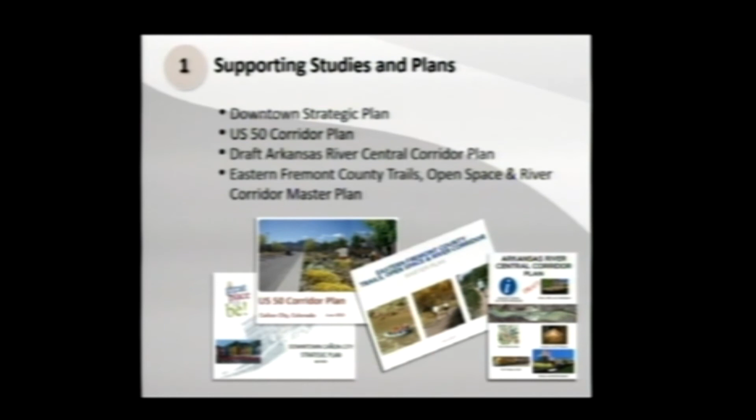So we wanted to make sure we were being consistent with the downtown strategic plan that the city had done, the US 50 corridor plan that was done a couple of years ago, the draft Arkansas River Central Corridor plan that was ongoing, as well as the Eastern Fremont County Trails, Open Space and River Corridor Master Plan. Those are all plans that were overlapping and had a relationship to what we were looking at here, and that was the basis for where we started.

So some of the key ideas out of the downtown strategic plan were, we wanted to have that quality and safe pedestrian environment. That was one of the key components. And looking at pedestrian crossing of US 50 with the connection to the parks and the riverfront trails and the Royal Gorge Route Railroad was an important piece of that. And that's something we carried through.

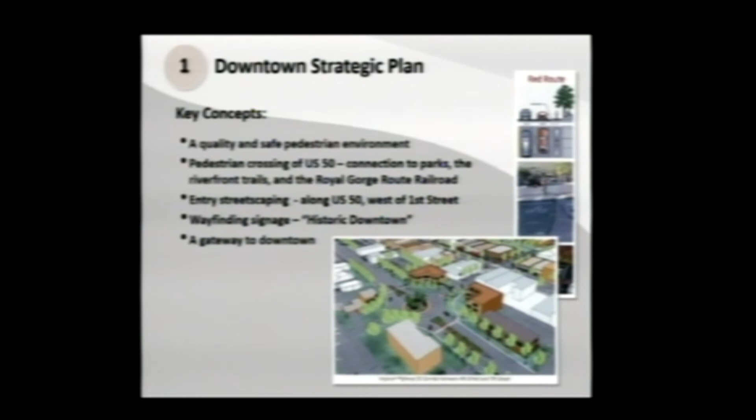We also were considering the entry streetscaping along US 50 west of First Street. That's part of what was coming out of the downtown strategic plan. And also the wayfinding signage from the historic downtown was a component that was also being considered.

The US 50 corridor plan had sort of taken the downtown plan as well and expanded on it a little bit, where US 50 really was a spine connector between Main Street and the Arkansas River, and really, where everybody's coming through. It almost acts as Main Street, even though it's not. We wanted the downtown gateways at First Street. It was one of the key components, as well as further down at 15th on the east end.

It also had 4 options in the US 50 corridor plan, which we used as a starting point for the alternatives and concepts, being the modified 5-lane concept, a 4-lane offset with a cafe zone, and a 4-lane with medians. The US 50 corridor plan also identified that need for wayfinding, very similar to what the downtown strategic plan was.

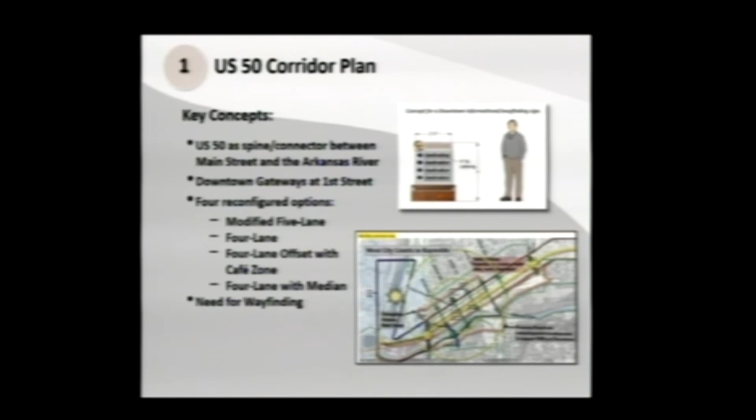The draft Arkansas River Central Corridor plan, some of the key concepts that came out of that were integral to our study. The primary gateway features at First Street was becoming a pretty common theme. The planning extends across US 50 between First Street and 3rd Street, so it was sort of that downtown area. It's also a visitor arrival area shown in Veterans Park.

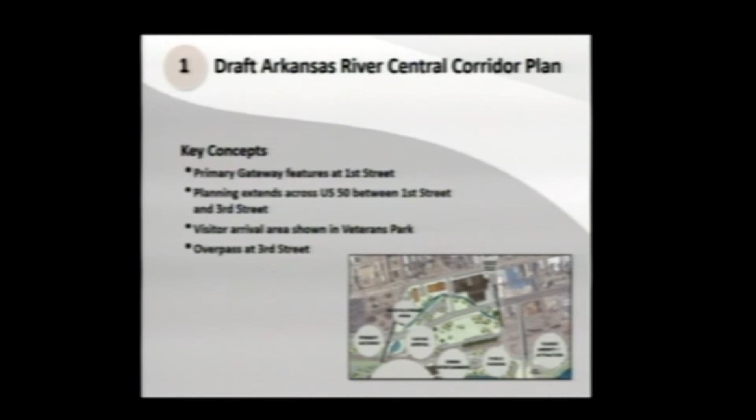So, you have a lot of people coming from the west, and that's sort of the first thing they see is Veterans Park as they're coming into town. And they also had an idea and a concept of an overpass at 3rd Street that was being considered.

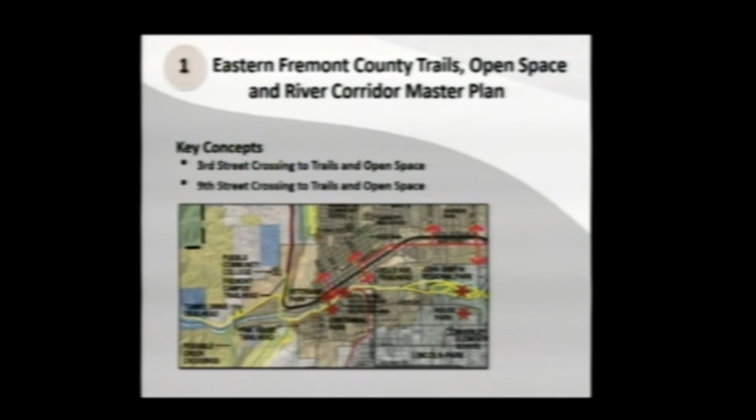The Fremont County Trails Open Space Plan, their key concepts being the 3rd Street crossing to trails and open space, and the 9th Street crossing to trails and open space. So we wanted to keep that consistent and work with how they were looking at getting the access from the trails to the downtown area.

So the study area itself, really when we started, was from 3rd Street to 9th Street. We expanded that a little bit to include 2nd Street. As part of the project, we figured it made sense to look a little bit further to the west. It includes the signalized intersections at 3rd Street and 9th Street. It includes both sides of US 50.

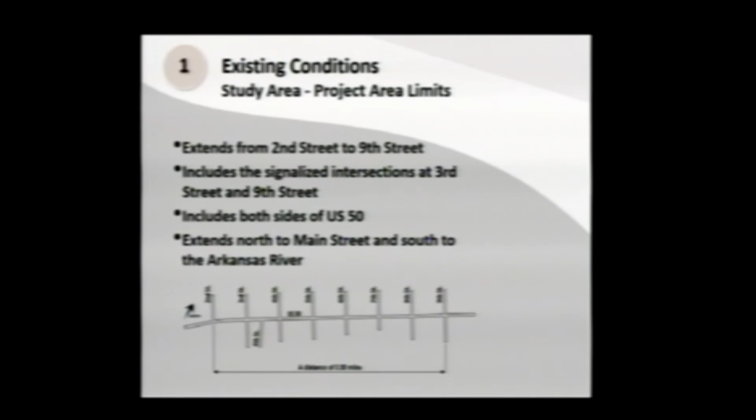The other extents of it extend north to Main Street and south to the Arkansas River. So it's really a very similar footprint to what the US 50 corridor plan was, however, just concentrated to this downtown section.

So as we get into looking at the existing conditions, the speed limit in the area is posted at 30 miles an hour. It's currently a 5-lane section that includes 2 through lanes in each direction plus a 2-way left turn lane in the center, with basically unfettered access between 3rd Street and 9th Street. There is a signalized intersection at 3rd Street and one at 9th Street.

If you recall, the history there is I believe there was a signal originally at 6th Street. When there was a desire to signalize 3rd Street, they actually moved the signal from 6th Street to 3rd Street, probably about 10 years ago.

There also are attached sidewalks that are varying width and don't meet ADA standards and aren't compliant right now in several areas. And several of the pedestrian ramps are not ADA compliant. Neither are the driveway crossings due to the cross slopes.

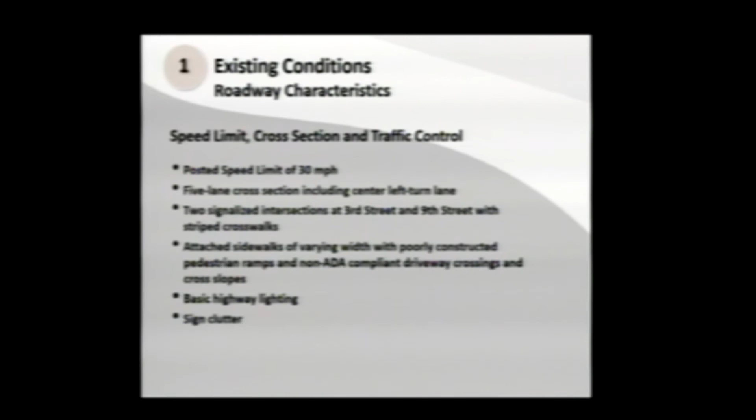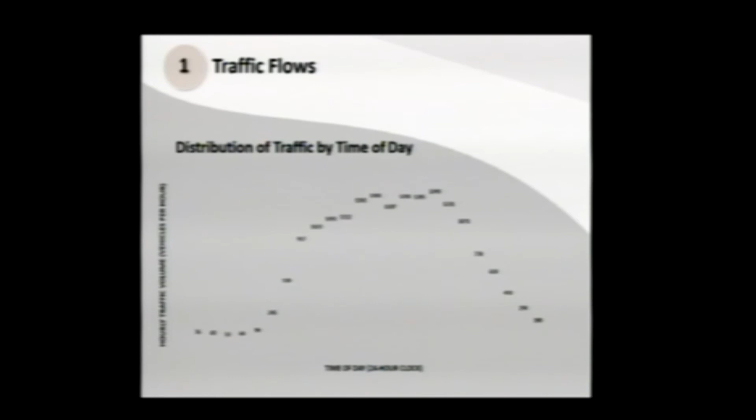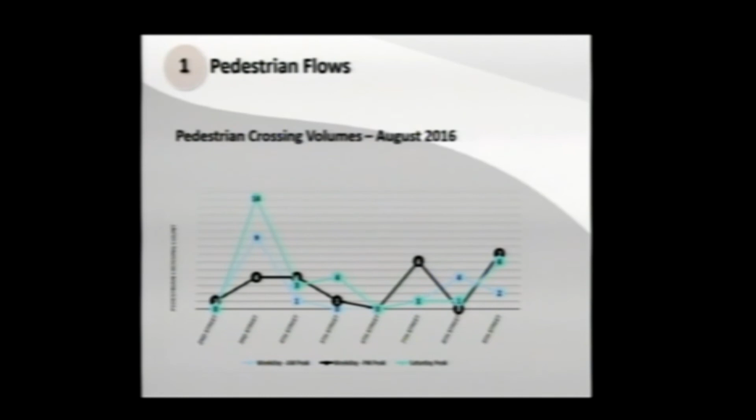We also looked at the intersection levels of service to determine what traffic was happening, so we understood what changes might impact traffic. In traffic analysis, operations are determined by what they call level of service. It's defined by the average delay that a vehicle has, with level of service A being the best, pretty much free flow traffic, to level of service F, where you're pretty much at a standstill and stop and go.

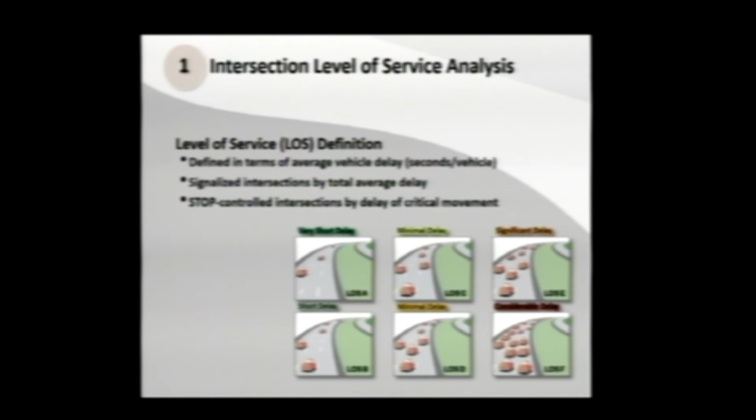As we go through our intersection analysis here, in general, at our peak times at 2nd Street, generally speaking, oops, hopefully I don't lose it. Yeah, so just sort of an example of what the volumes are looking like and the level of service.

We can see that the volume is heaviest at 9th Street and east of 9th Street. It starts to tail off as you go to the west, where you're at 21 to 24,000 vehicles per day east of 9th Street, and by the time you get to 3rd Street, you're between 12 and 17 here, I guess, at 2nd Street. So you can see a lot of traffic does start to fall off as you go west through the corridor.

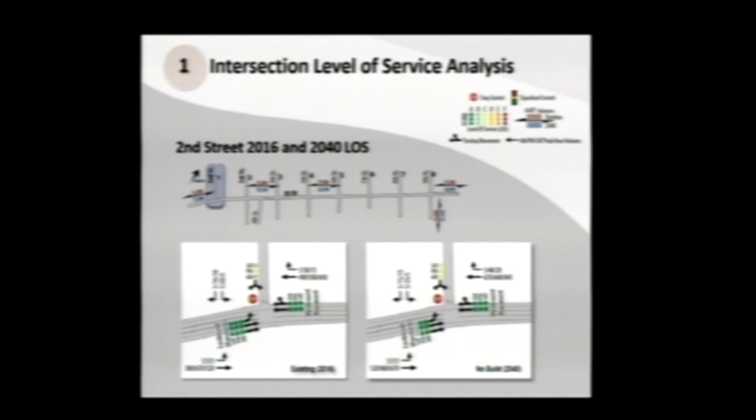So one of the other things we wanted to do with the stakeholder committee was reviewing the goals for the project, what we were trying to accomplish. The city had originally provided goals within the original contract documents. We worked with the committee to refine those goals, and ultimately, through those goals, we developed criteria that we would use for screening the alternatives to develop the best solution as we move forward.

So the original goals were relatively broad. We're looking at enhancing safety and increasing bicycle and walking activity, maximizing investment in network connectivity, improving state and regional economy, expanding recreational opportunities, enhancing quality of life, improving public health, and so on. And as we went through that with the stakeholder committee, we were able to expand on that some.

So when we're talking about enhancing safety, we refined those goals to be more specific to include pedestrian safety, vehicle safety, bicycle safety, and emergency operations, like emergency vehicles being able to get through the corridor. Security overall, there was a concern with vagrancy and making sure that we're not doing something that would encourage vagrancy in the city. And then security from a standpoint of making sure that things are open and feel open and safe to people.

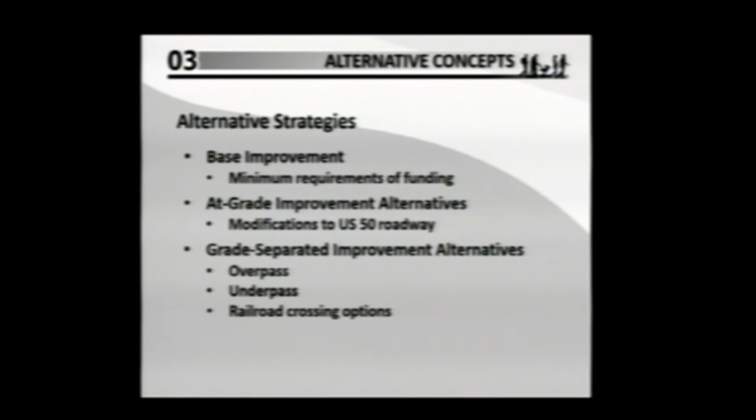And then ultimately, what other long-term solutions can we consider as well? And that's where the idea of the overpasses, underpasses, and even crossings over the railroad, because getting folks across the railroad and then ultimately across the river is also something we wanted to be considered. So a little bit outside the scope of this project, but it was adjacent to it, so we wanted to make sure that that was something that was looked at.

So again, the base improvements were reconstructing the pedestrian ramps and the driveways along the corridor between 3rd and 9th Street as a sort of bare minimum. Replace the poorly constructed pedestrian ramps, gain ADA compliance along the entire roadway, including the crosswalks as well, and the driveways specifically, since there's a few in the corridor that actually meet ADA that were redone, but most of them don't. So in order to meet the ADA requirement, we'd have to reconstruct those driveways.

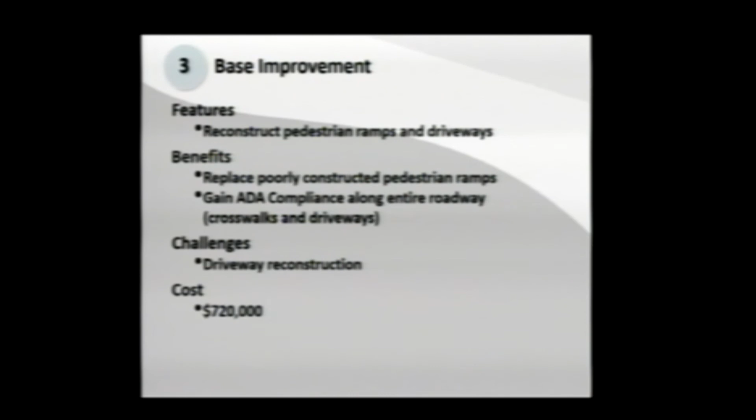The base improvements we're projecting right now being about a $720,000 investment for the project. It wouldn't change the cross section of the roadway at all, so the roadway would stay the same, but it would all be longitudinal improvements on the outside of the roadway; that's where those improvements would really happen.

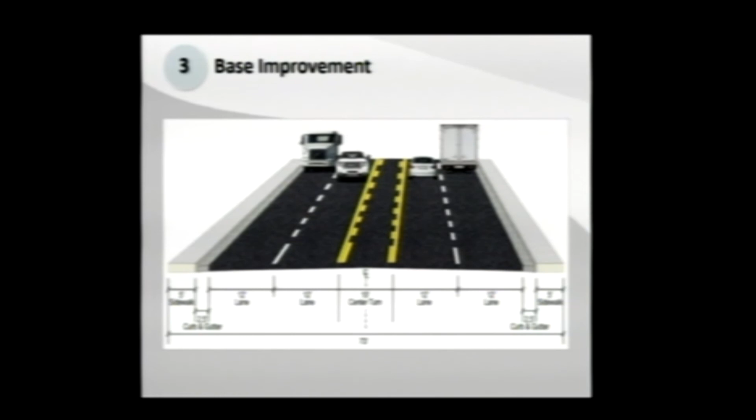So then we looked at some other at-grade improvement alternatives. Some of the features, in addition to the base improvements, would be reallocating existing right-of-way space to more pedestrian-friendly uses, enhanced, safer pedestrian crosswalks, opportunities for aesthetic enhancements, and then traffic calming are also some of those benefits. The adjacent property access modifications and increased maintenance cost effort are a little bit of the challenges.

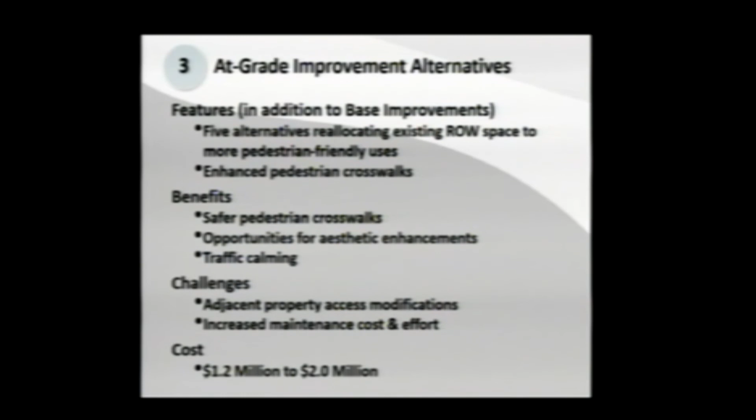So when we look at some of the at-grade improvements, and I'll go through the alternatives, these are the options where we look at adding some medians, potentially changing the curb lines and different roadway configurations. And as we start adding to that base case scenario of improvements, it starts adding up to $1.2 to $2 million worth of investment. And these are sort of the ideas that we were considering.

The top one here is basically keeping the outside curb lines the same as they are today, replacing the two-way left turn lane with a raised median that could be landscaped with mid-block crossings. A lot of the benefit in this type of scenario is you have some safety benefits of traffic calming, where you'll make the road feel a little bit narrower, so people will drive a little bit slower. They feel a little bit more constrained.

It provides an opportunity for when people are crossing the road, they're crossing 2 lanes at a time, and they have a refuge in the median, so they don't have to get all the way across the roadway in one fell swoop. With this concept, there's also the opportunity to basically signalize it. So you can use a HAWK signal or a rapid flasher to make sure people are aware that there's a crossing there, and you can stop traffic. And people only have to worry about looking one direction to get across to the median, and then continue from the other direction. So you really have much fewer conflict points.

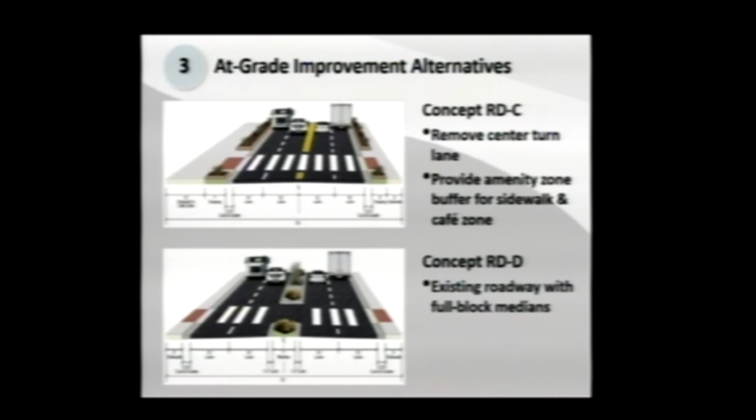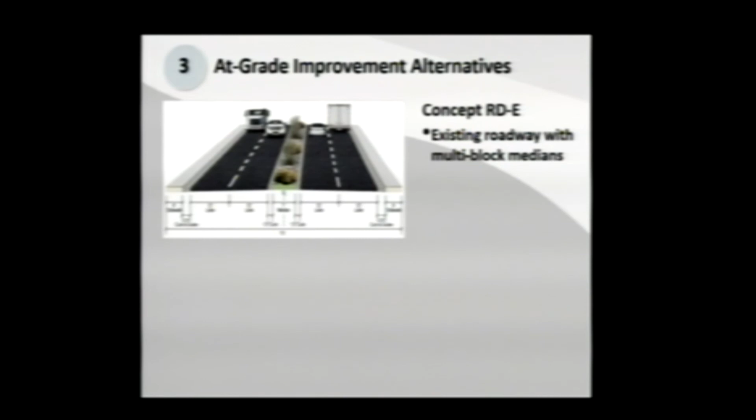And then concept E was a median that would actually go through. There was a multiple block concept where the median would go through and potentially remove full access at a few of the cross streets. Basically, what that does is make a longer median that provides a better opportunity for landscaping, and it changes access pretty significantly, where a couple of the cross streets will become right in, right out versus full access as it is today.

Can I ask a question? Yeah, all of these alternatives seem to involve removing the center turn lane. So what does that do to traffic? I mean, all left turns have to be made from a traffic lane. And what does that do to traffic flow at the peak traffic times?

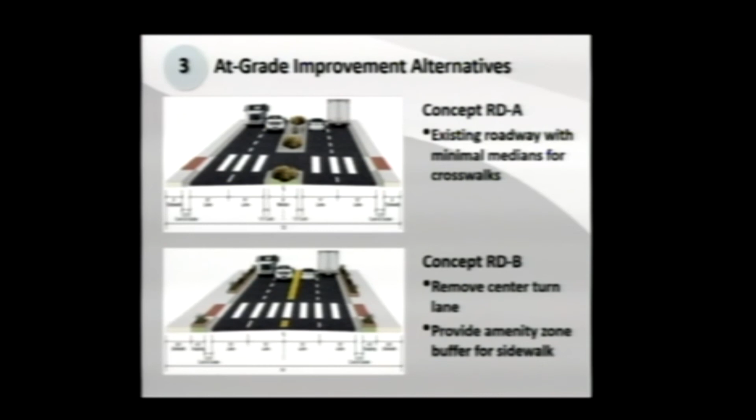Well, on the raised median concepts, what we've done is at the intersection, we still have the left turn pockets. So the only one that really takes away having to turn out of the through lane is concept C, and concept B, where we put just the two lanes in either direction. The raised medians will allow us to do the turn pockets at the intersections. So these are mostly mid-block concepts.

Yeah, basically. Getting back to what Dennis was talking about, there isn't a business along Highway 50 from 9th Street to 2nd Street where somebody doesn't need to make a left turn going into the business, the gas station, the bank, and all those other places in there. The inconvenience, in a sense, to those business owners, what's the impact of that?

Especially also the fact that there's only certain areas where they're going to be able to make that left turn. And the reason I bring this up is because we look at the concept with the problem they're having on Highway 50 further down where this one housing area went in and the highway department blocked it off so nobody can do it. We could have some kind of the same concept there, but the biggest problem is going to be, because we do a lot of truck traffic in this town coming through here, and getting rid of that left turn lane and having people wait to do that, you could really tie up that intersection.

You could really have tie-ups all the way back from, say, 3rd Street where the light is, all the way back to 9th Street. You go on 9th Street right now at peak traffic hours, and Main Street is blocked off because everybody's trying to get there to go across. You have the same problem with the turnaround by Safeway and all that.

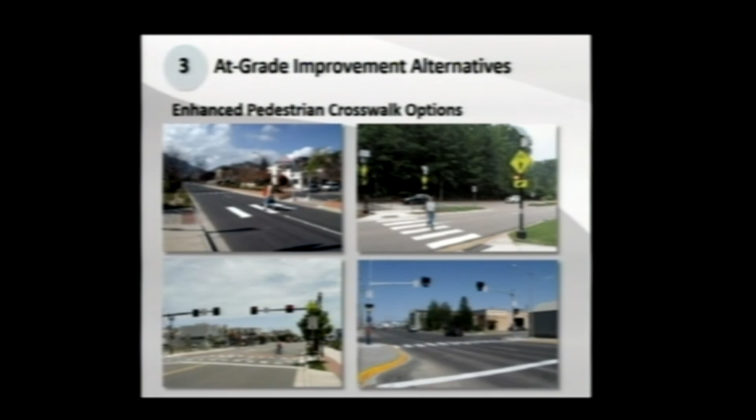So again, just looking at the at-grade improvement options, this is where we look at how the crosswalks can be done. When we're looking at the at-grades with median concepts, you have two lanes with a median refuge to be able to cross the other sections. This shows how we could enhance those medians and enhance the crossings of the roadway, with some different examples.

We did look at grade separated improvements as well, and some of the features there are really a dedicated pedestrian or bikeway structure. The benefit of a grade separation is it completely protects pedestrians and bicycles from vehicle traffic, separates them out, and provides an opportunity for an aesthetic statement, whether it's an overpass or underpass.

Some of the challenges we have are that without the base improvements and at-grade improvements, there's limited ability to address the corridor-wide pedestrian concerns. So even with a grade separation, we would still need to do that base scenario of improving the ADA accessibility along the corridor.

One of the other challenges was locating the structure for maximum long-term use. There are several plans in place right now that could impact what makes the best sense for a location for a grade separated structure, and it's a big investment, so you want to make sure you consider where the right location is ahead of time, considering long-term needs, other plans, and redevelopment considerations.

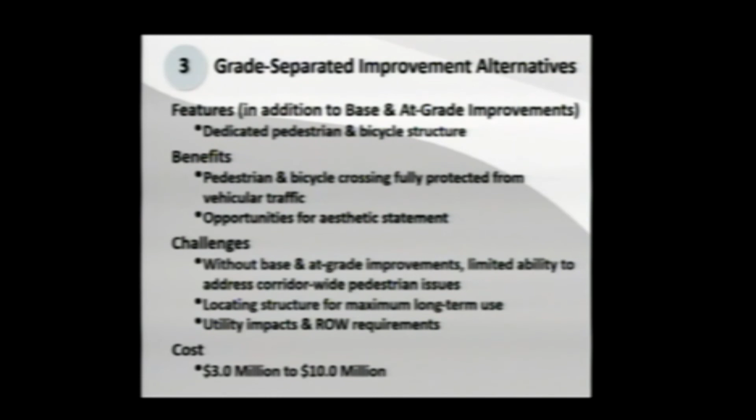There's also significant utility impact and right-of-way requirements when we start looking at grade separations, depending on where they are. Grade separation costs would range from $3 to $10 million, depending on how extensive and how big you go, and what your ultimate goals are with those.

So one of the concepts, brought forward from the US 50 corridor study, was an overpass between 2nd and 3rd Street. That overpass would come down 2nd, cross US 50, and tie into the sidewalk system along Veterans Park, which ultimately ties down to the Arkansas River. It uses the natural topography for the approach ramps, which helps, and the property required is all publicly owned, not private property.

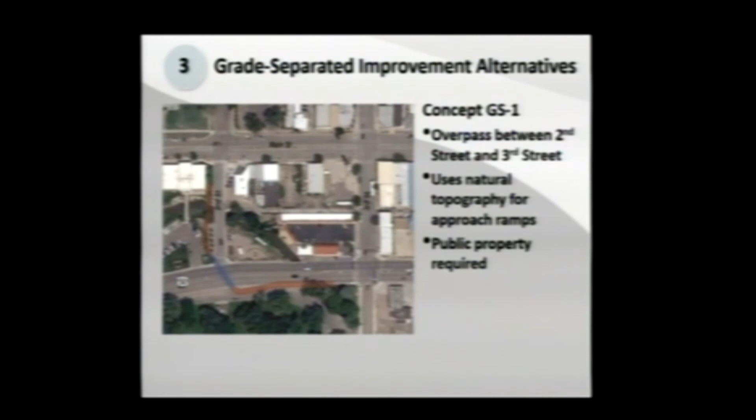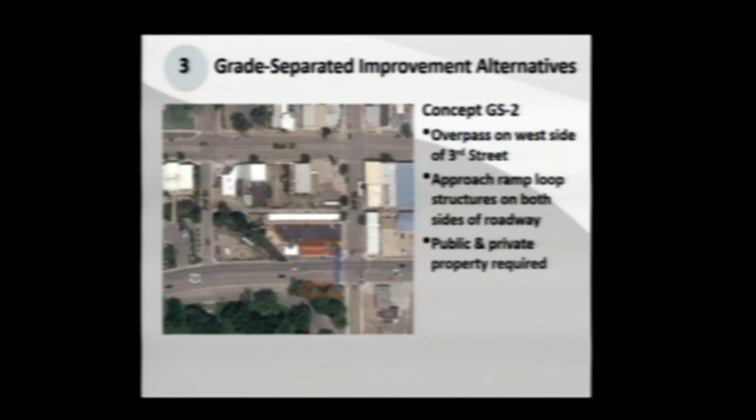Another concept considered was an overpass on the west side of 3rd Street. Some of the challenges with doing an overpass at 3rd Street, which connects that downtown corridor, especially with the railroad on the south side, is that due to grade differentials we have to figure out how to get the grade down. It becomes pretty intensive because with ADA compatibility you're limited to a 5% maximum grade, so trying to make up a 17 to 20 foot grade differential becomes pretty extensive, and the potential right-of-way impacts really start to add up with an overpass option.

There was also the idea of looking at doing it on the east side of 3rd Street instead, to try and minimize the impact. However, we still have those same challenges with ramping down to get back to grade and tie into something, again with impacts to the surrounding property.

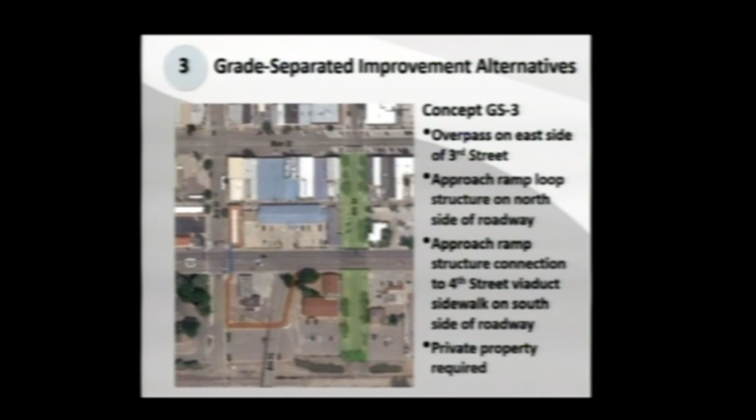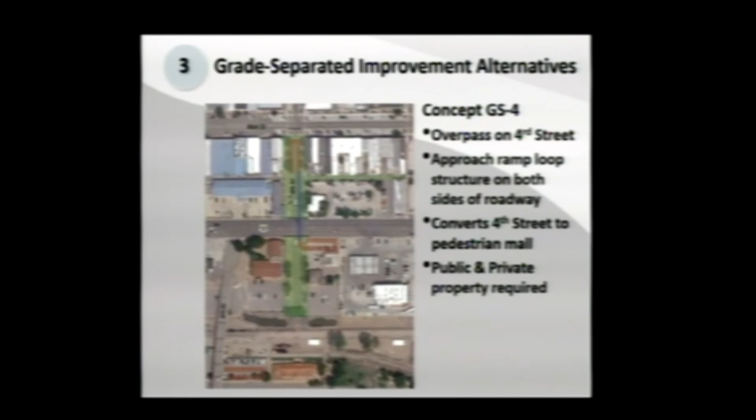We looked at grade separated improvements at 4th Street as well. One was an overpass option, where this idea considered that if you're doing an overpass, there would likely be the need to close 4th Street and make it more of a pedestrian-friendly mall. We're trying to maintain access to businesses along 4th Street, so the structure becomes fairly large in order to maintain alley access, with the ramp coming down on the north side closer to Main Street. This would convert it to a pedestrian mall type concept, and would likely require both public and private property to make the grades work for ADA compatibility.

Another option considered was an underpass at 4th Street. This is something that we considered at 3rd Street as well.

The idea here is, with the underpass option, there's two different ways to do it. One is just a traditional box culvert type underpass, like a 10-foot by 10-foot box culvert. That's the most cost-effective way to do an underpass, but it's somewhat constrained, and I know there was a lot of concern with the committee about having something like that. The other options are to make them much larger, wider open options with more of a park-like feel, but those require truly a bridge structure. So that's when costs start to increase pretty significantly, when we have to start building an actual highway type bridge versus a box culvert for an underpass.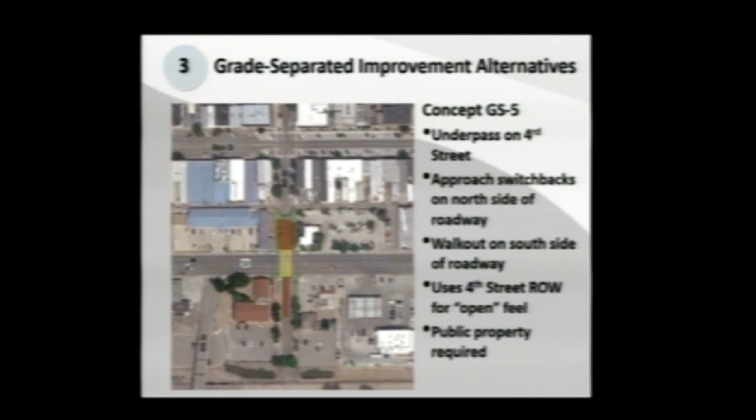So these are sort of the ideas of what pedestrian underpasses could look like, whether it's an arch type structure that goes underneath, or an open bridge structure where you have a much wider access. You've got the grades coming out - you can see here this is the big long approach into the underpass to make up that grade for ADA compatibility, but it opens the structures up, so it makes it more open.

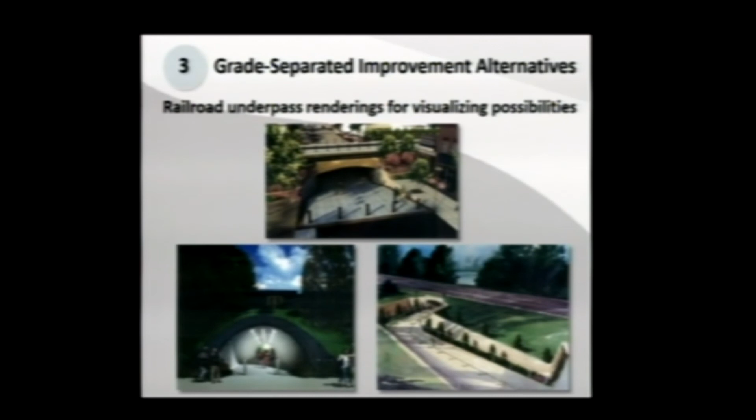Utility issues - that was one of the things with the underpasses, when you start going underground you're dealing with all the utilities that are under there and having to relocate utilities like that, which just starts to drive the cost up of underpass options.

We also looked at some ideas of how to cross the railroad and get people grade separated across it and how that could tie into the whole plan. Over here at 3rd Street, one idea is you bring a bridge structure up along the west side of 3rd Street that could go across the railroad, continue across the parking lot, then come back and tie down into the trail system and into the Arkansas Riverwalk Trail. It becomes a long structure, but it does grade separate folks to get all the way down over into the station for the railroad, as well as tie into the trail system. It makes more of a direct connection into downtown without folks having to do any at-grade crossing of the railroad.

Another idea and concept that came up was to enhance the sidewalk along the existing 4th Street bridge, tie into that, and then come down with a switchback system and bring the sidewalk back down to the parking lot grade at the Royal Gorge, basically at the railroad station over here and in the parking lot, to make that access.

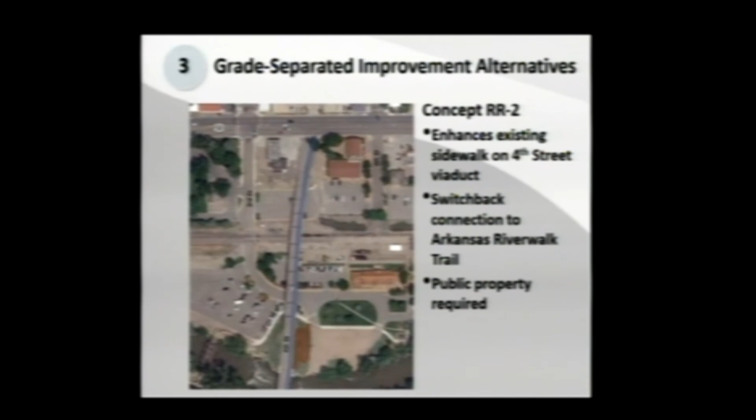So those were sort of the main concepts that we went through and developed for how to handle the pedestrian crossings in several different ways, and the challenges that we were going through.

As we went through the evaluation criteria, we worked with the stakeholder committee and had them look at the evaluation as a focus group, where they looked at different alternatives and scored each of the concepts. We also had them do it as an individual assessment, and then we took that and applied some of the engineering understanding and judgment that we have into one of those criteria.

The bottom line is when we look through that, a lot of the criteria - the focus group had committee members grouped into 3 focus panels who evaluated the alternatives. Group 1 looked at the base case scenario and then the at-grade concepts. Group 2 was looking at the other 3 at-grade concepts, and Group 3 looked at all the grade separation concepts, with the results showing that the at-grade concepts were scoring a little bit better.

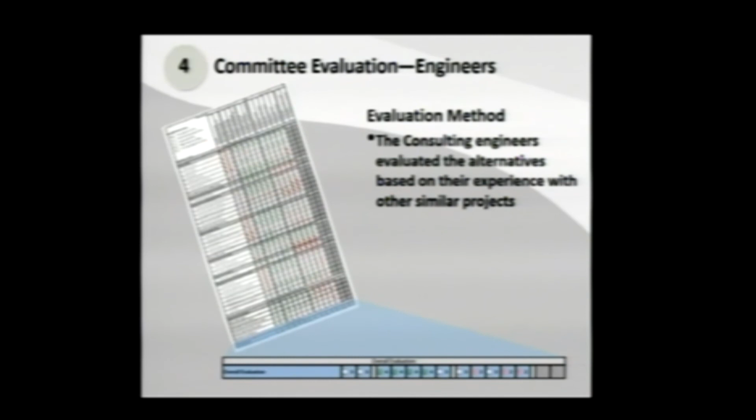And then as we applied some of the engineering judgment in there as well, and took into consideration some of the challenges with maintenance and constructability, things like that, one of the things that was coming out is, again, the at-grade concepts were rising to the top a little bit more, with the grade separated not quite meeting the overall goals of the project that were conveyed and determined at the beginning of the process.

So based on the screening criteria and a lot of discussion with the stakeholder group, we developed a recommended concept, or recommended alternative, to present to the public as well, and then bring to you all. Some of the features of the recommended alternative that came out of the committee was basically a concept that was going to maintain the existing roadway width, build raised medians, again with turn pockets at the intersections, and provide up to four crosswalks, mid-block crossings between First Street and 9th Street.

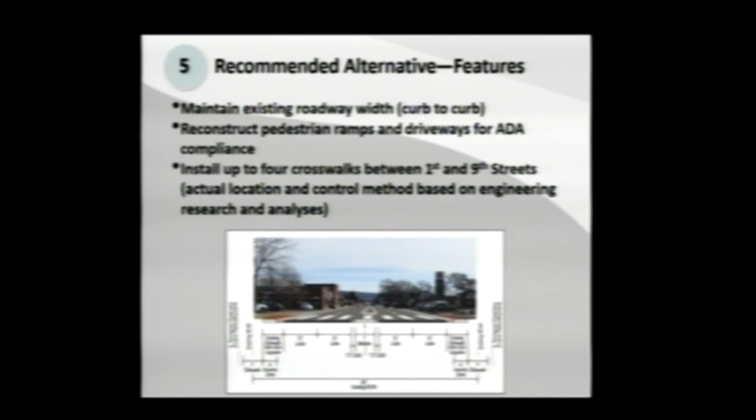And we would actually look at what the final locations of those crosswalks would be as we get into the final design phase of the project, to determine exactly where they would go and what kind of control would need to be done, whether we phase it in with just signing at the crosswalks, whether we do a rapid flasher for initial warning, or if we go to the HAWK signal, which is more of a stop signal or pedestrian signal, along with those.

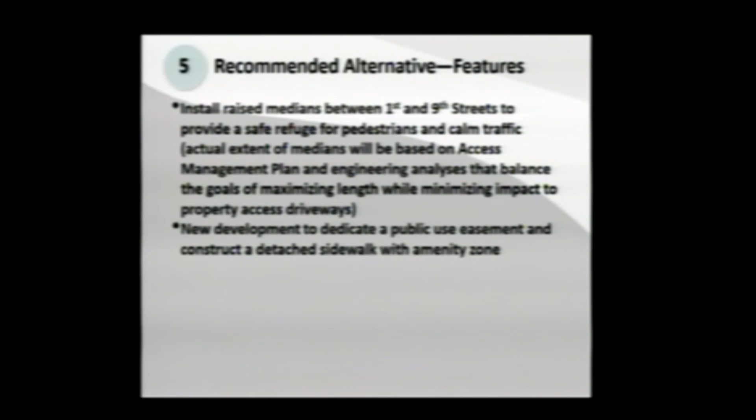So again, install raised medians between 1st and 9th Street to provide a safe refuge for pedestrians and calm traffic. It provides a lot of opportunity to really change the look and feel of the corridor, so people know that it is the downtown area that you're driving through, and encourage them to stop. The actual extent of the medians would be based on an access management plan. This is where we'd need to go through that analysis to determine how big the medians are, how long they are, and whether we need to modify some of the median locations to make sure we provide adequate access to businesses that are there, working through that process with CDOT.

One of the other ideas is that for new development, as things redevelop along the corridor, request that they dedicate a public use easement and construct more of the detached sidewalk with an amenity zone. The committee did understand the benefit of detaching the sidewalks and getting separation between the curb line and the traffic, but there really was a real concern with not wanting to reduce the capacity of the roadway by reducing lanes or eliminating turn lanes. So that would be an opportunity to do that through the redevelopment process if desired.

So some of the benefits: it provides additional safe pedestrian crosswalks to encourage more pedestrian use of US 50. Right now, it's not an inviting corridor to try and cross. We truly believe that if you improve those crosswalk locations, it's going to improve pedestrian accessibility through the corridor and encourage more pedestrian activity. It provides a real big opportunity for aesthetic enhancements in the medians. We're able to provide landscaping, improved lighting, and the medians provide a lot of opportunity for wayfinding signage throughout the corridor.

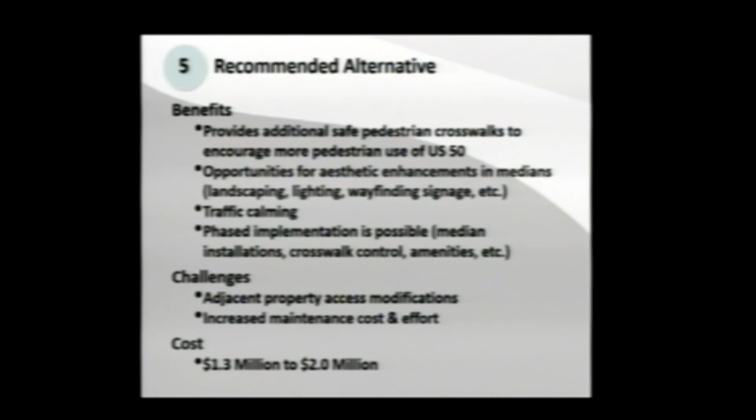We do recognize that some of the big challenges we need to deal with as we move forward would be the adjacent property access modifications. We understand that putting in medians is a big change, and it does change access to businesses. That's where the access management plan comes in, where you sit down and talk to each individual property owner that might be impacted and discuss that and determine other solutions. What are the concerns? How can we mitigate that if possible?

And ultimately, when you put the median in and have landscaping, there's going to be a little bit of an increased maintenance cost and effort to maintain the medians and the landscaping in there. Again, with that recommendation being $1.3 to $2 million.

The idea here is that the concern of the committee and where we're at right now is that nobody was feeling really comfortable recommending a grade separation at this stage, because there's a lot of unknowns of what that would need to be. And for the funding for a grade separation, people were concerned that we wouldn't have enough money to build it right now, which is a fair concern, and it wouldn't provide the immediate benefit throughout the corridor that the more at-grade solutions would provide. However, it's not precluding it from the future.

It's one of those ideas where, again, with all the different plans that are ongoing, I think it'd be premature to say that we're going to do a grade separation at this location, and with the other plans happening, it might need to change. But it is something that we truly believe could happen in the future and would likely be warranted in the future as things change in Cañon City.

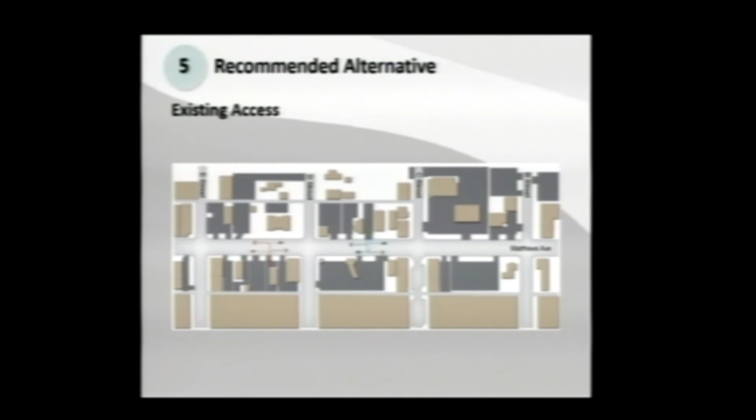So, like I said, we recognize that access is a big concern. This is just a typical drawing that shows that right now you have unfettered access to all your business locations. The black areas represent parking and pavement areas, the brown represents buildings; it's just a generic type of development. So right now, you do have that access. It's unfettered in and out. When we look at adding medians, it does change access.

And how can that access be changed? Well, in areas where you have alleys, you can still provide right in, right out access through the alley, or people turn left in on the cross street, access the alley, and then access the parking lots from behind. Very common scenario in a lot of downtown areas and overall in urban areas. It still allows folks that want to turn left out to go out through the alley, go to the cross street, and make those left turns at those full movement access points, which is really where people expect that to happen.

Yes, sir? In that situation, you've got somebody pulling a 15-foot camper behind their pickup, and they've got to go out and go around through an alley and this and that. I'm not sure that's going to work, unless there's something you can tell us different. Well, it depends. You're right. I think sometimes the alley access works well. And then delivery trucks also. Mm-hmm. And a lot of times delivery trucks do use alley access. That's what they're intended for, especially in downtown areas; they use the alleys for deliveries instead of parking out in front and blocking the streets.

But yes, that is something we'd have to look at through the access consideration. When you look at each property owner and what their major use is, if there is that high demand for large vehicles, how do we make sure we maintain that access? We need to determine that, and maybe the alley doesn't work for that scenario. Maybe there's something else that needs to happen in that area.

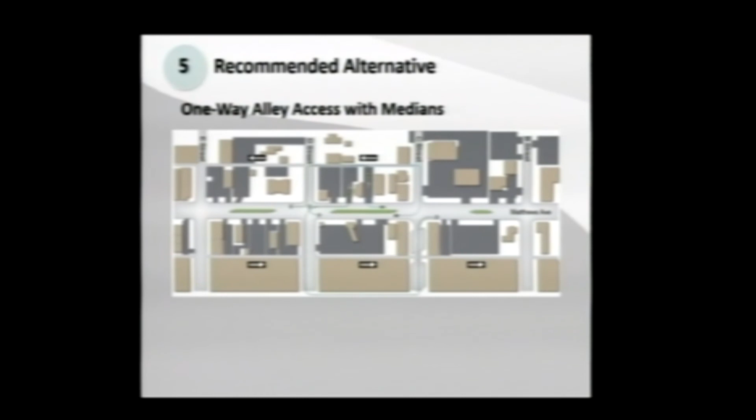...or that vehicle has a chance to even see the pedestrian. Dave, you and I talked at length about this. Again, we're just looking at a generic model here, as we know, right? He more than addressed that concern that as they go forward with this, there's a bigger plan here that they need to look at, and that's when you're going to be involved.

I appreciate that, Scott. I need to share with you, I've had two bad experiences in the past where plans were brought to me and they did what they were required to do as far as contacting the businesses, but I'll guarantee you it was a done deal before they came to me. Now this may be different because it's directed by you, and I do feel more comfortable with that. But on previous projects, I'll guarantee you I didn't have any say-so on that.

So, Adam, regarding that concern, anything that happens here, this is going to have to come before us? Is that what I'm hearing? So you have seven voices here. Well, I appreciate that, Scott. That's not in what the agenda said, and that's why I was a little nervous about that. That's fine. So, you know, but you've made me comfortable, Kathy.